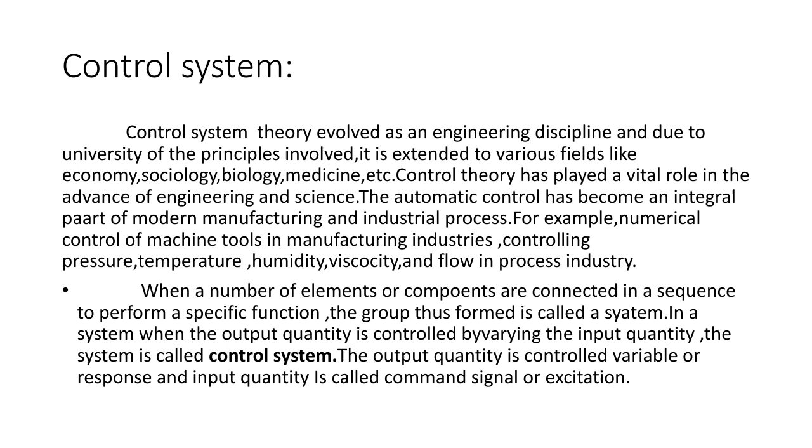In a system, when the output quantity is controlled by varying the input quantity, the system is called the control system. The output quantity is called controlled variable or response, and input quantity is called command signal or excitation. In control system, there are two types: open loop control system and closed loop control system.

Coming to the open loop, it itself indicates that there is no link from output to input. Only by changing the input manually does the output vary. So any physical system which does not automatically correct the variation in its output is called an open loop system, or control systems in which the output quantity has no effect upon the input quantity are called open loop control systems. This means that the output is not fed back to the input for correction.

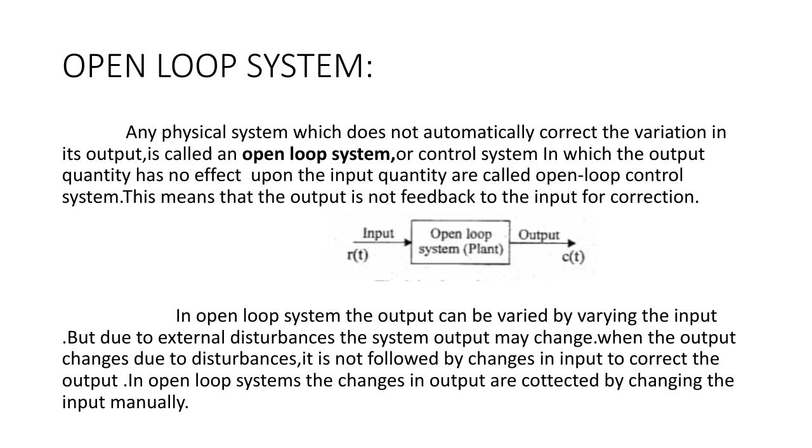Here the error signal produced will not be corrected at the output. In an open loop system, the output can be varied by varying the input, but due to external disturbances, the system output may change. When the output changes due to disturbances, it is not followed by changes in the input to correct the output. In open loop systems, the changes in output are corrected by changing the input manually. R of t is the input, there is an open loop system, and C of t is the output we get.

Coming to the closed loop system. Closed loop system is nothing but there is a link from output to input through the feedback connection. Here feedback is present. Control systems in which the output has an effect upon the input quantity in order to maintain the desired output value are called closed loop systems. Here the output is fed back to the input, and then the controller is connected to the open loop system.

The open loop system can be modified as a closed loop system by providing feedback. The provision of feedback automatically corrects the changes in output due to disturbances. Hence, the closed loop system is also called automatic control system. Here, the output is fed back to the input and then the controller block is connected to the open loop system. It means any errors produced at the output are automatically corrected by connecting the feedback block. So it is also called automatic control system.

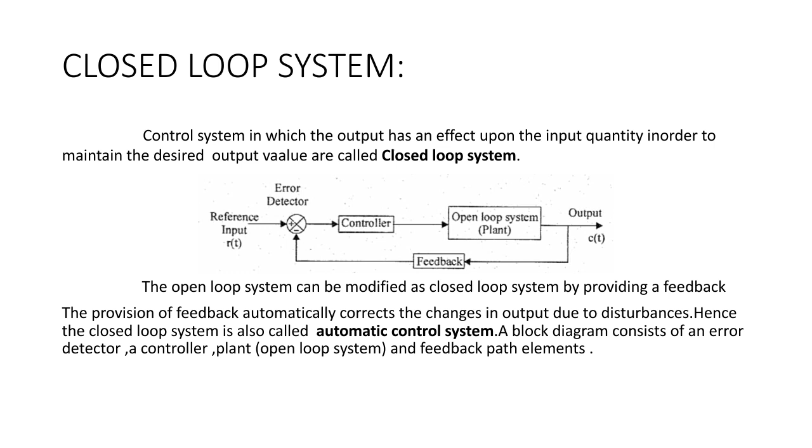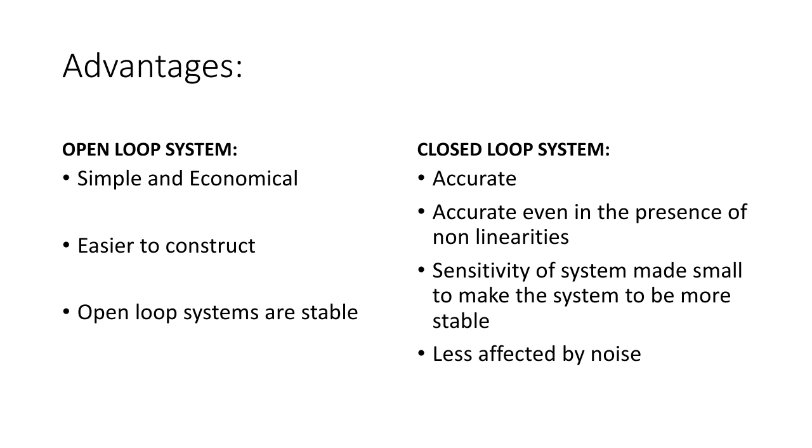A block diagram consists of an error detector and a controller, an open loop system, and feedback path elements. The advantages of open loop system are that it is simple, economical and easier to construct. Open loop systems are stable. Coming to closed loop system, it is accurate even in the presence of non-linearities. The sensitivity of the system is made small to make the system more stable. Closed loop system is less affected by noise.

Coming to disadvantages, open loop system is inaccurate and unreliable. Changes in the output due to external disturbances are not corrected automatically, as we just saw. Coming to closed loop system, it is very complex and costly, and feedback may lead to oscillatory response. Feedback reduces the overall gain of the system, and stability is a major problem in closed loop control system. To construct the circuit with stability, there is some problem.

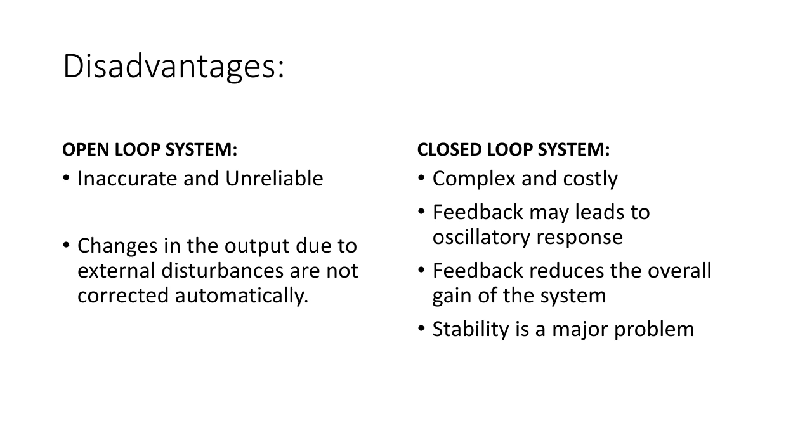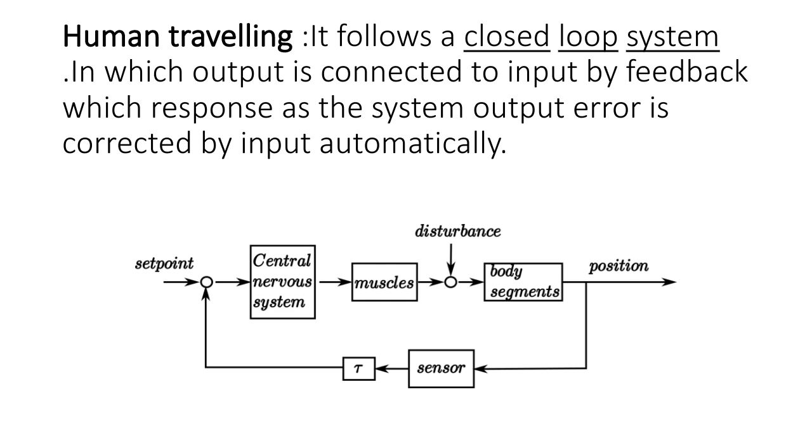Coming to our topic, human traveling on the road. A human traveling on the road follows a closed loop system in which output is connected to input by feedback, so the system output error is corrected by input automatically. Here we'll see the block diagram. Here the set point, the central nervous system. The human has the central nervous system, and then muscles which are interconnected, and some disturbances arising, and then body segments, which give position. That position goes to the sensor, and through sensor feedback it is connected again to the set point.

When a human is traveling on the road, we all know the reflex action. When we are walking or running on the road, if any obstruction catches our leg while walking, there is a sudden raising of the leg. This is nothing but reflex action. The man traveling is a general open loop system, but when an obstruction occurs, the human body senses it and sends the message to the central nervous system, that is, the brain. Again it sends the information to the body to raise the leg.

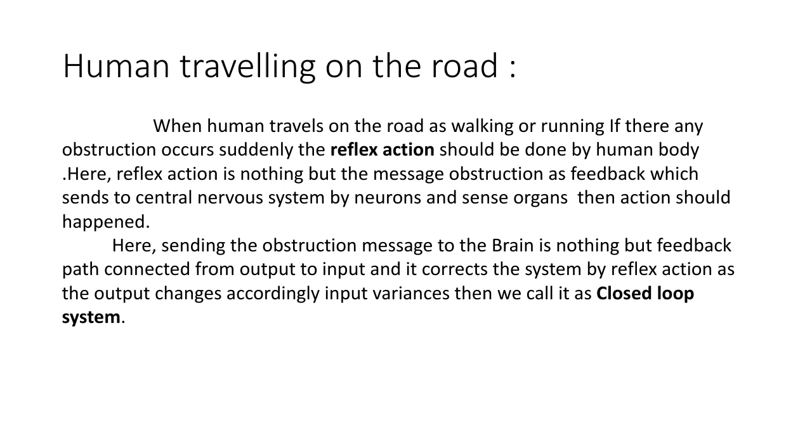Here the sensing is nothing but a feedback element. Why? Because our moving body is a general example, but here the reflex movement is a feedback system. The sensing is nothing but the feedback system.